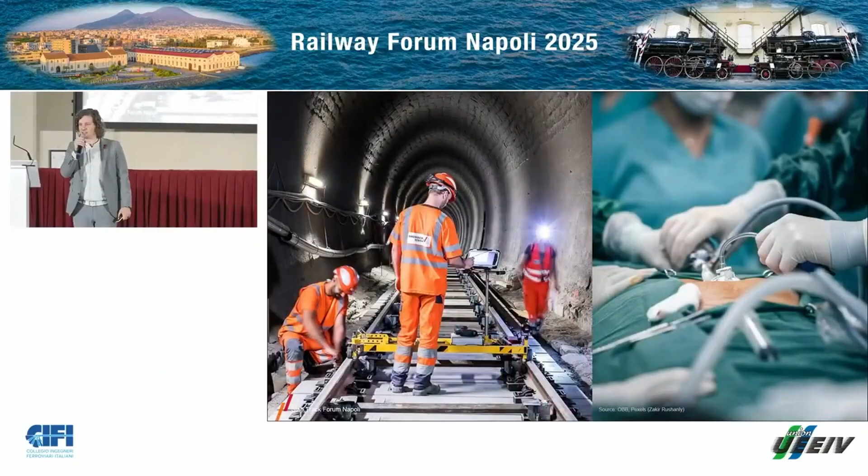What does track construction have in common with operating? Operating in the sense of opening someone's body, looking in there, fixing some issues. Maybe you have an idea. Generally, you will rely on what the person is doing and that they are doing a good job, that they know what they're actually doing, and you will completely trust them.

Also, the railways are a really trusted way of transport. When you're sitting on a train, working, sleeping, whatever you're doing, you trust that someone took good care of the rolling stock, that someone constructed the tracks that you are running on in a good way, that there won't be an issue. And you will not think about any dangers. We feel relaxed, we feel easygoing on trains, and this is because of railway engineers, such as the people we have in here.

So what railway companies and infrastructure owners are looking for are, of course, proven and reliable solutions, but also people who can actually execute properly. Because being a surgeon operating, it's not enough to have the best equipment, a sharp scalpel, or a good light to see what's there, but you also need to know how to actually use those tools.

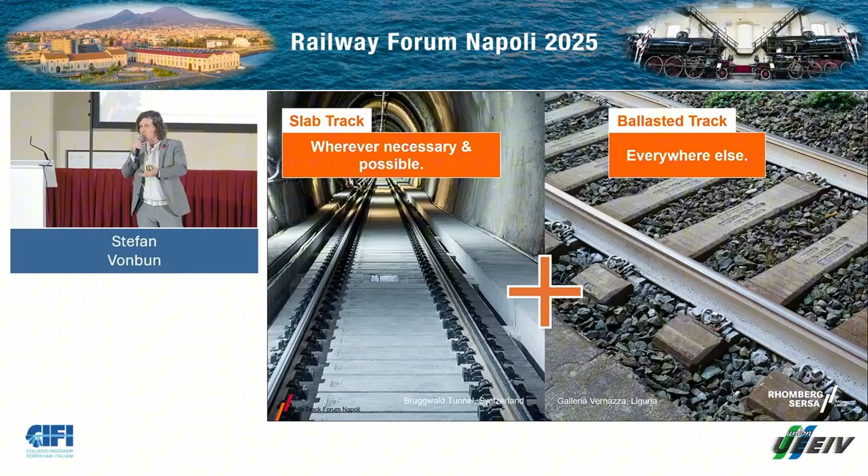So back to the operation slab track. I see slab track as a system that should be used wherever necessary and possible, and everywhere else we will have ballasted track. So it's not an either or, for me it's both. We need the proper systems for the right application. And this is also true for the different kinds of slab track systems. All of them have advantages, disadvantages, so we really have to think about what is this track going to be used for, what are the main design parameters in that project, and that's how you find a best for project solution.

Other things that are necessary for building slab tracks, this is also true for what the colleagues from PORR and VCE said. They said precision is necessary. Yes, I agree. Precision is super necessary because once it's cast in, you can't move it anymore. So you have to be sure that this thing is actually in the right place. Another thing is safety, for sure. Safety is one of the most important topics in the railways, because if we make mistakes, it could potentially lead to humans being harmed.

And last but not least, we need brains to do all that, and not just a little bit. I think we need many brains. It's a team sport. Building track, and especially slab track, is a team sport where a lot of different people have to interact and have to work together to actually make this a success.

I now want to go into a few highlights of projects that were executed by Rhomberg Sersa. The first of which was in Germany, the whole project conglomerate of Wendlingen-Ulm and also Stuttgart 21. There we had, for the first time ever, a system in operation that we call ROMAT, which is kind of a track adjustment robot. We saw in previous presentations that every top-down system needs to be spindled up and somehow put into place, so the top of rail is actually where it should be. Rhomberg Sersa developed this so-called ROMAT, especially for top-down construction, to get into a more automated way of constructing, in this case, the Rheda 2000 system.

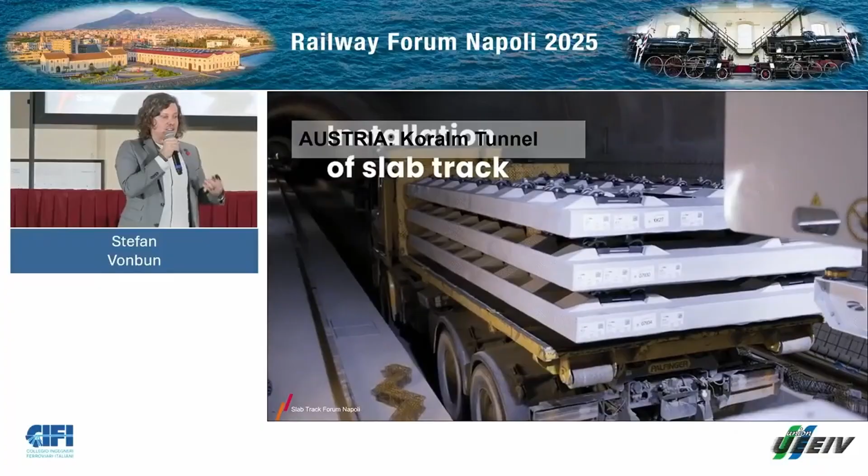Next example, we already heard a little bit about it from the view of PORR and VCE. The Koralm tunnel, also a really important project, essentially a century project in Austria, that is now connecting cities and regions of Austria that were before very far away, so to say. This tunnel really reduces the traveling time and thus enables people to meet quicker, and it brings economic opportunities to regions that were before kind of cut off inside of Austria.

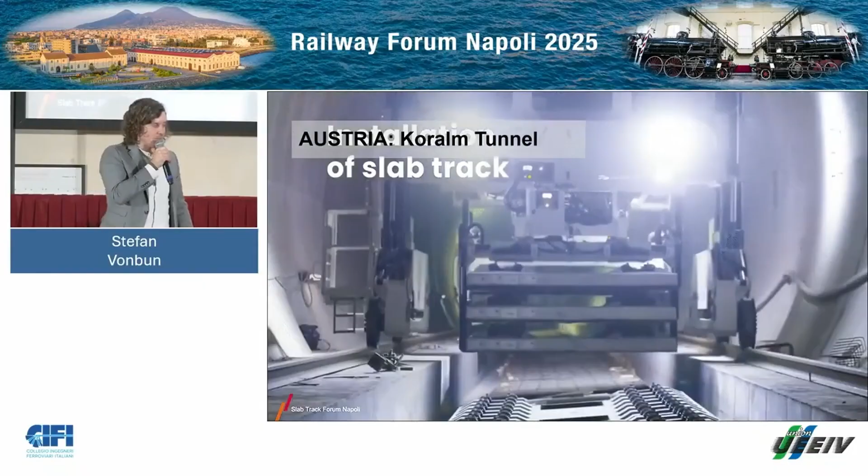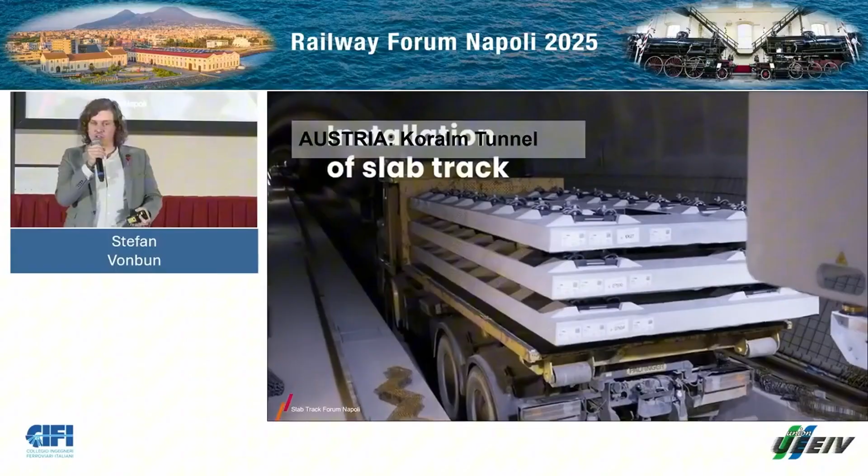An innovation that we used there was a gantry crane, as you can see on this little video. The gantry crane was used to place the PORR slabs, and it can lift 3 slabs at a time. It was a really efficient way of bringing the slabs into the tunnel and accurately placing them.

So build and forget is not really a philosophy that we're on board with. I think you have to think to the end of the life cycle as well. The planned life cycle, but maybe also the life cycle when it ends earlier than expected. Here you can see a picture from a refurbishment currently taking place in Germany, Hamburg-Berlin, where they are actually cutting out track slabs. This is quite tedious work.

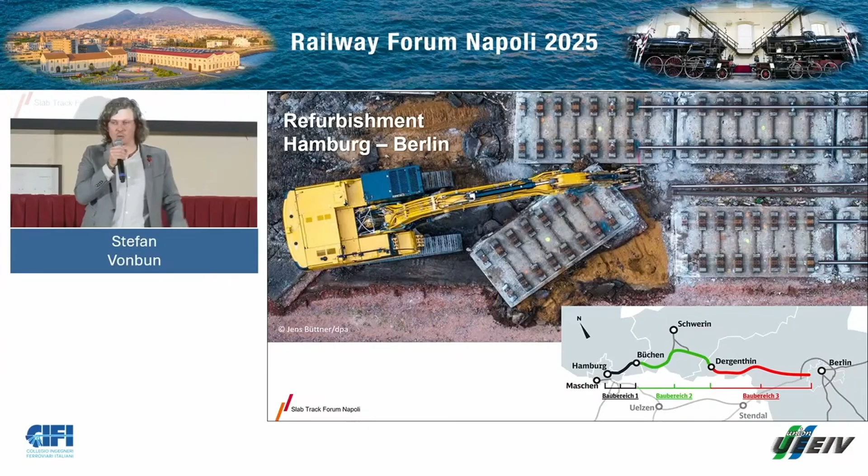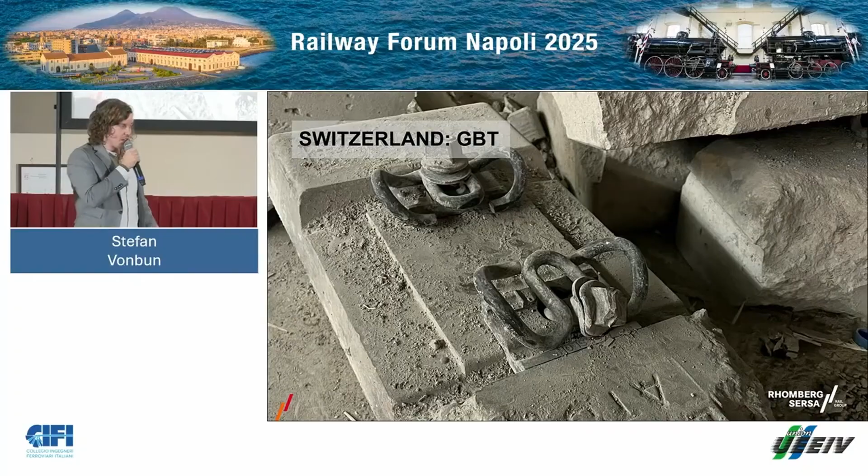Because I not only want to talk about newly built track, but also refurbishments. Some pictures from Gotthard Tunnel. We saw in the previous presentation of Thomas Dorfner mentioning of the LVT system in Gotthard Tunnel. Unfortunately, there was an accident there with a derailment, and in the end, this had to be refurbished.

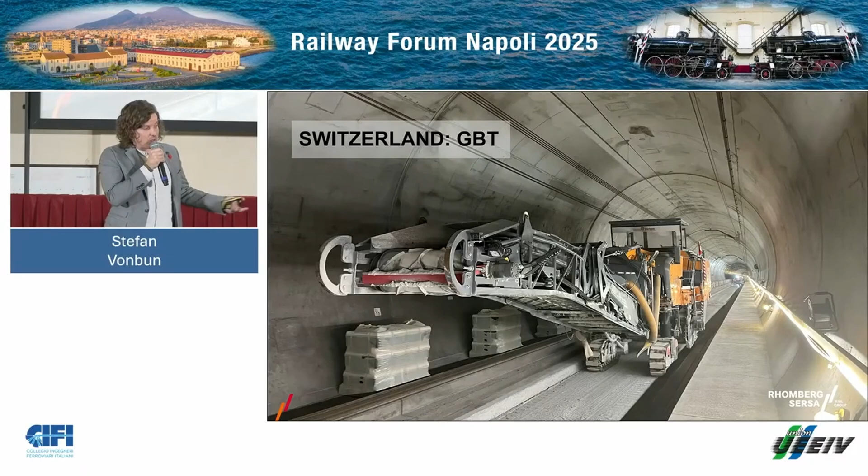And for the sake of speed, high accuracy of the final product, and probably also because the insurance was paying for it, the way of completely deconstructing and building it up newly was the chosen path. So they didn't go for what is potentially possible, replacing the blocks. In the end, we milled out all the concrete and reconstructed the whole slab again with LVT.

And also here, the accuracy is of course very important. Otherwise, you end up with a system that you have to ride on for 60 years, and if that's not accurate, then you have a problem. So, Rhomberg Sersa, as a company, has built more than 800 kilometers of slab track in the past 25 years. So we have a really proven track record of building slab track.

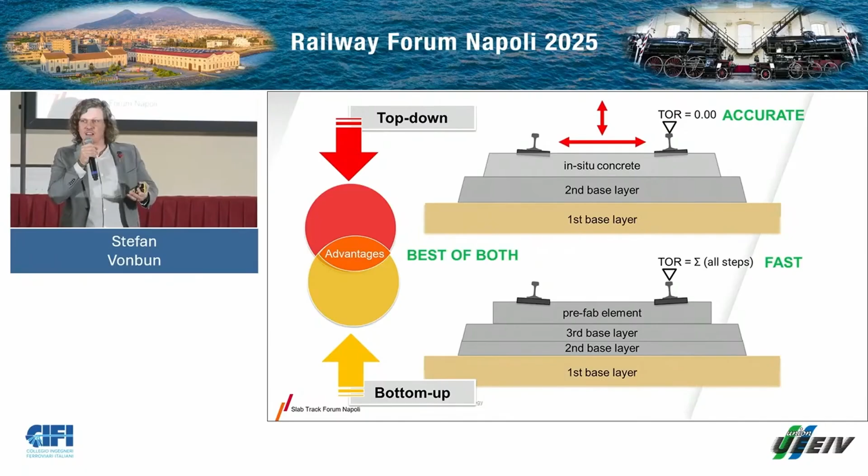And like every inventor, we thought, okay, some things can still be improved about the systems that are out there. So we have heard today a lot about top-down systems, where we actually have to put the top of rail in the correct position, and then we cast the whole system into place. There's also bottom-up construction, where you have higher levels of prefabrication, and you use less on-site grout or concrete. And so Rhomberg Sersa developed a system that combines these two worlds and takes advantage of the good things of each type of construction.

When I last year interviewed a lot of our guys who actually built these systems, this is what actually stuck out to me. The guy said, Stefan, it is as easy as constructing with Lego. And me being a long-term Lego fan, I was happy about this analogy because I think it works really well in describing how our system works. And so, of course, I had to make a Lego version of our system.

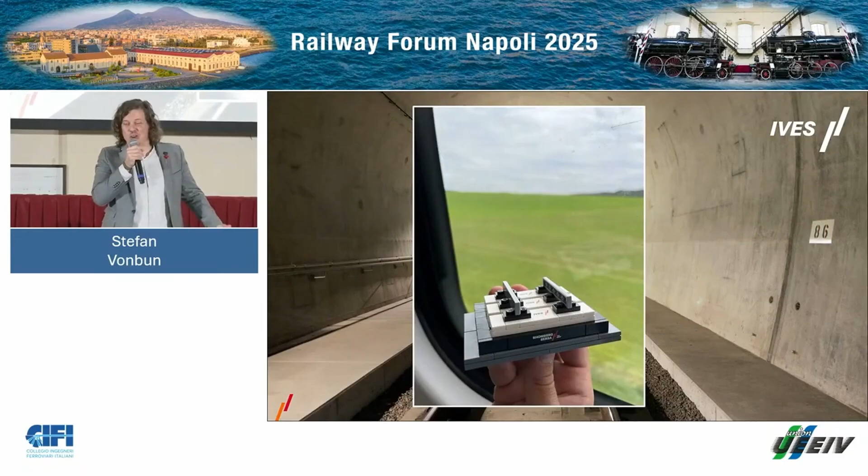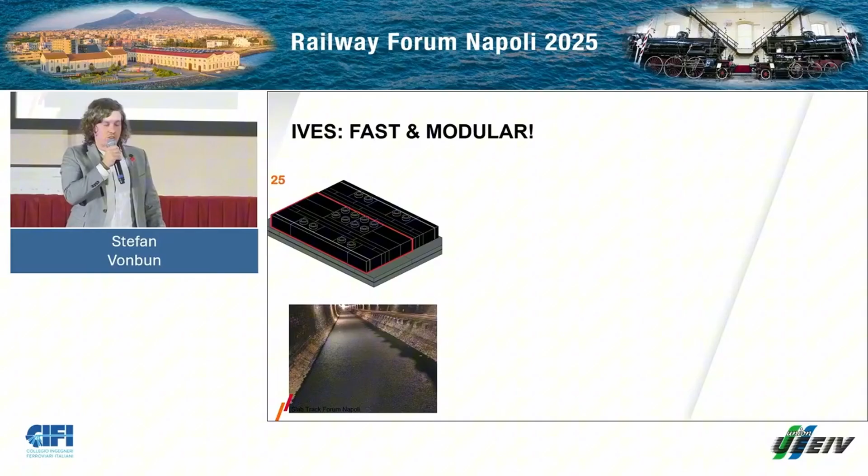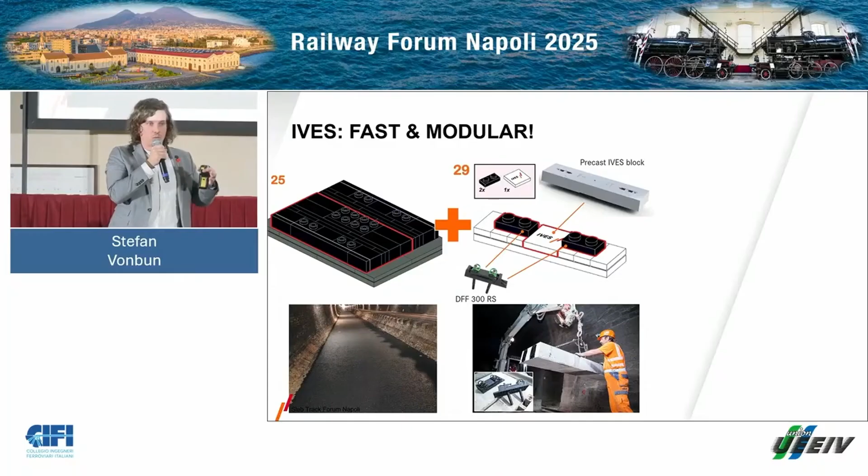And if we talk about the construction of IVES, that's the name of our slab track system, it goes really easily. You have an asphalt base, similar to what the colleagues from PORR were describing earlier. We add prefabricated blocks, and the, let's say, different part is we use a direct fastener, which is cast in place on site. And you end up with a really fast to build and reliably stable slab track.

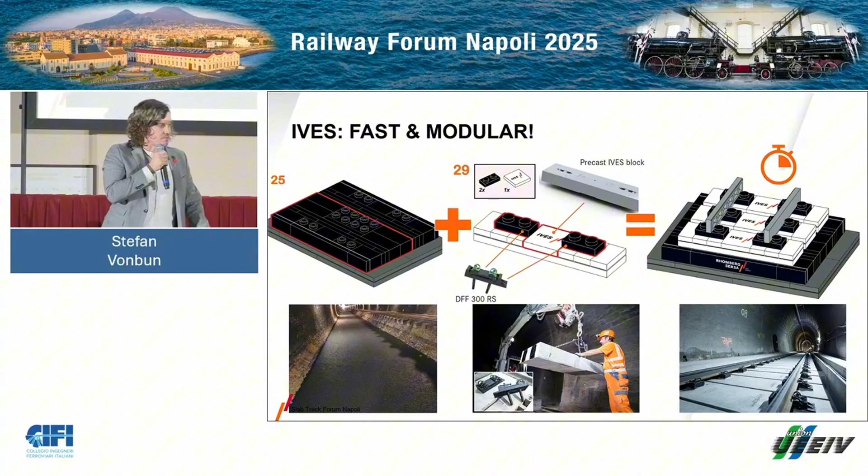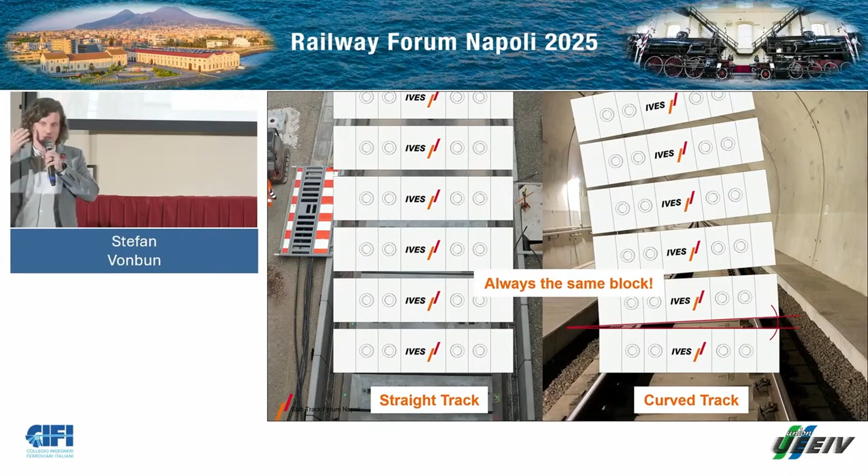Also noteworthy is the fact that it doesn't matter whether you are on a straight track or you go into a curve. You don't need a special type of block or slab. So adhering to the example of the world of toys, you all know these wooden railway tracks that children use. They're very easy to build. It's quite hard to make this into a curve. So either you end up with a polygon or you need a curved piece. And in the room of your children, it might be easy to manage the logistics of these two.

But imagine a 33-kilometer long tunnel somewhere out in the outback of Austria, and then you end up with a huge logistical question mark. How to bring the things there. You have to be just in time, just in sequence, and with the IVES block, you don't have this topic, and down to radii of 40 meters, you can use the exact same block no matter where you go. You can stockpile them and have them in a warehouse. If there's an accident, you just take the blocks from the stockpile and replace the ones that are there.

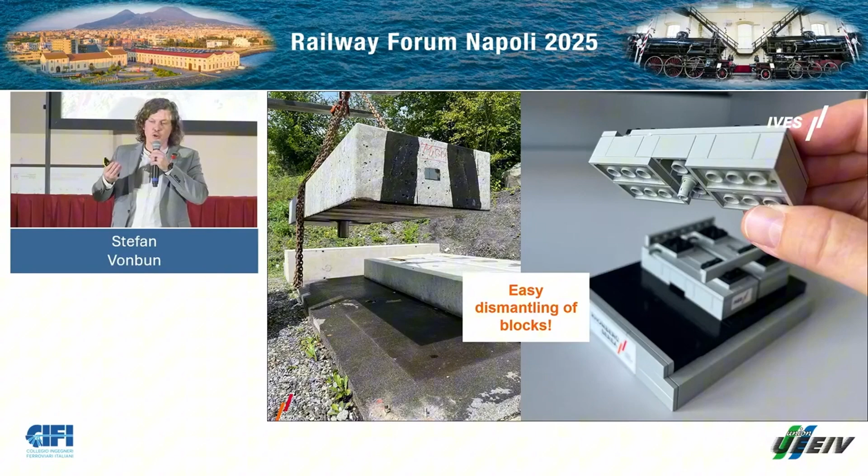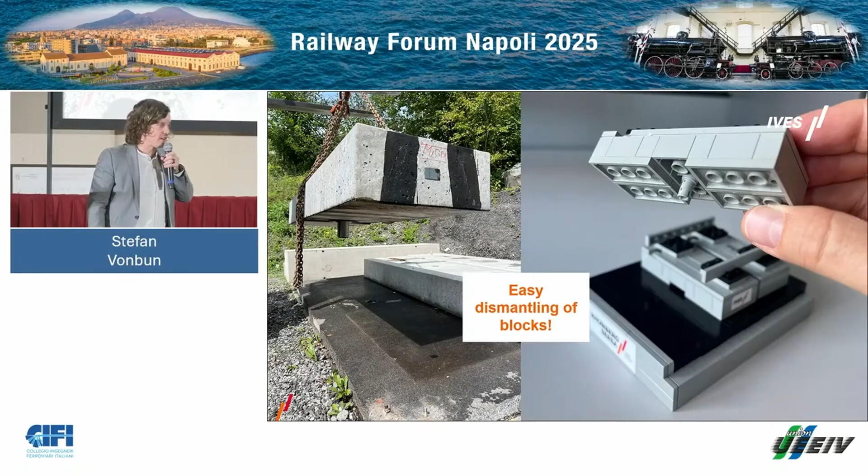Talking about replacement, this system, still adhering to the Lego philosophy, is just a positive interlock between the block and the bottom surface. So we are using a type of shear dowel. You can see it a little bit here on the left-hand side. You can see it better on the Lego version. It's essentially a stainless steel tube that helps to transmit longitudinal and transversal forces. And by means of this dowel, it's fixed in place, but if you lift it up, you can remove the blocks easily and exchange them in a case of emergency.

A lot of people would say, okay, that's all nice and good, but does it actually work, and how does it behave in track? Yeah, this is a very good question, because laboratory tests, etc., are fine, but it's better to actually test the things out in the track. This special piece of track is actually a weighbridge. So trains that run over it are being weighed when they run.

It's located in eastern Australia, and the trains that travel over it are coal trains, and they transport a lot of coal there, 30 tons axle load, and very long trains all year long. And our system has been in place there since 2017. And we have accumulated 1,230 million tons, or 1.2 billion tons, in just shy of 8 years. And if you compare that to, let's say, regular mainline loads in Central Europe, you would end up with an equivalent operating time of about 62 years.

If we would take the Langenlebarn example, where Porr had installed their slab for the first time, where they have 40 MGT, then we would end up with 31 years of, so to say, real-life simulation of the lifetime. And because this works there so well, we got together with the client, with ARTC, and wrote an article about it that was published in October, so just recently, in the magazine ZEV Rail, which is a German-speaking magazine, but we are also working on an English translation of this article.

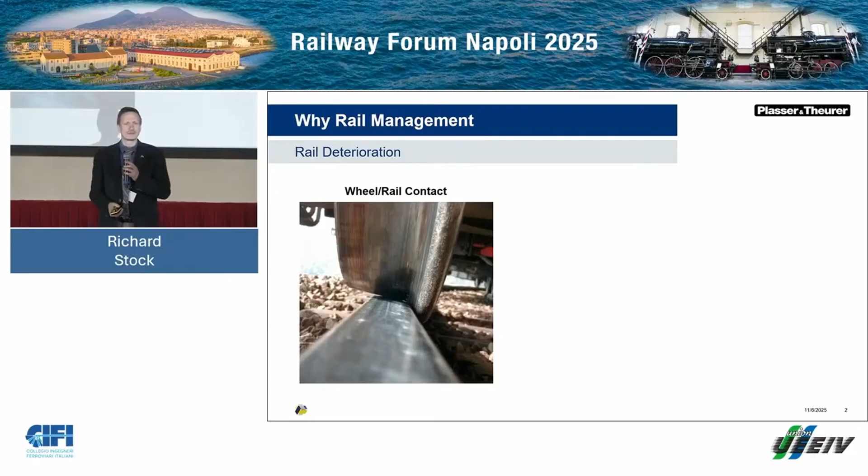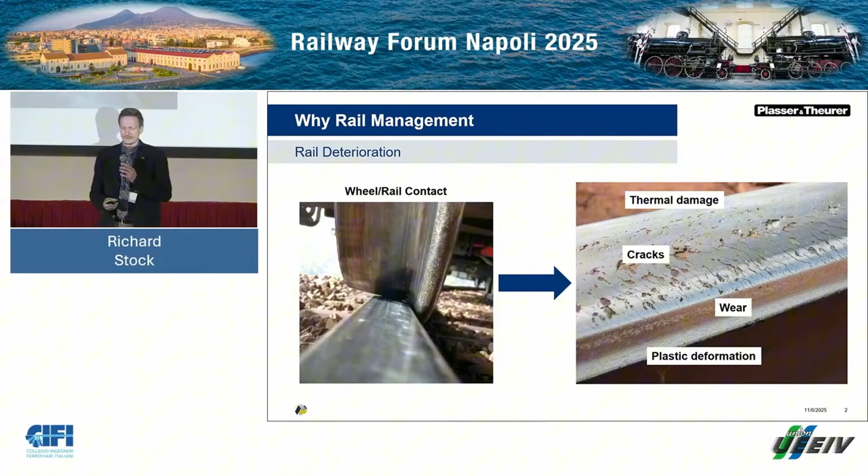And when we look at the rail, we have the rail wheel contact, and this will cause some problems. Plastic deformation, wear, cracks, thermal damage. All these effects will limit the life of the rail. So we need to do something. We need to do rail management.

And to be fair, from a rail point of view, and I'm a rail expert, it doesn't really matter whether there is slab track or ballasted track, because a lot of these problems will be the same no matter which track form you have. But of course, there will be some implications about slab track, and we'll talk about this a little bit later. So in our toolbox, we can look at the material, the joining technology, the profiles, the track quality, the friction management, the actual rail maintenance itself, and then all around this measurement technology and data handling.

Let's get started. So the cornerstone of every new track construction when focusing on the rail is choosing the right rail grade for the right application. There are several rail grades according to the European specification available, a standard grade and several heat-treated grades that will have an optimized material structure for improved performance, which means higher resistance on the one hand against wear and plastic deformation, on the other hand also against crack formation. So by choosing the right rail grade from the beginning, you can do a lot of good. If you don't choose the right rail grade, you start with a lot of problems from the beginning.

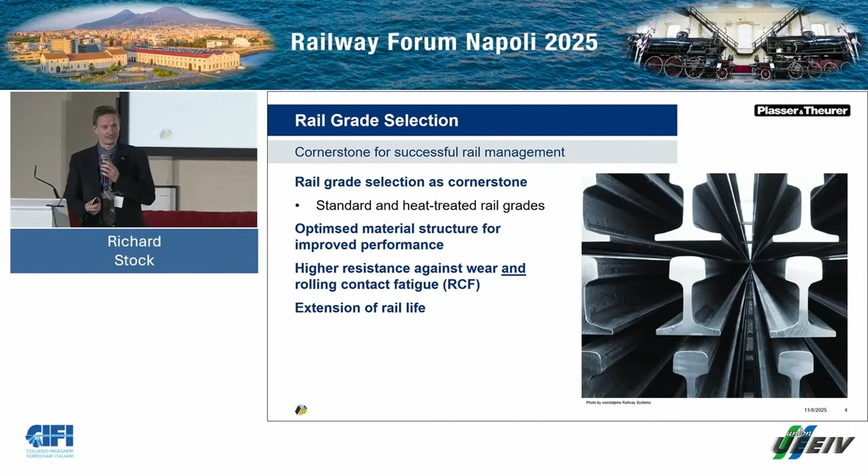Okay, we need to join the rails, of course, because every connection in general represents a discontinuity. We can have classic rail joints. We've seen this in the presentation today. We have isolated rail joints, and of course we have welded rail connection as the preferred way of connecting rails. When talking about welding technologies, thermite welding, flash butt welding, in Asia also gas pressure welding as the main technologies.

What's our goal? We want to create a long-lasting connection that has the same or at least similar properties as the two rails that I connect. And for sure, I want to prevent premature damage, because I can choose the best rails, but if the weld fails prematurely, I can't benefit from the properties of the rails. So the ideal connection is something that the wheels really don't see, don't feel when passing over this. Speaking about welding, the process with the highest welding quality is flash butt welding.

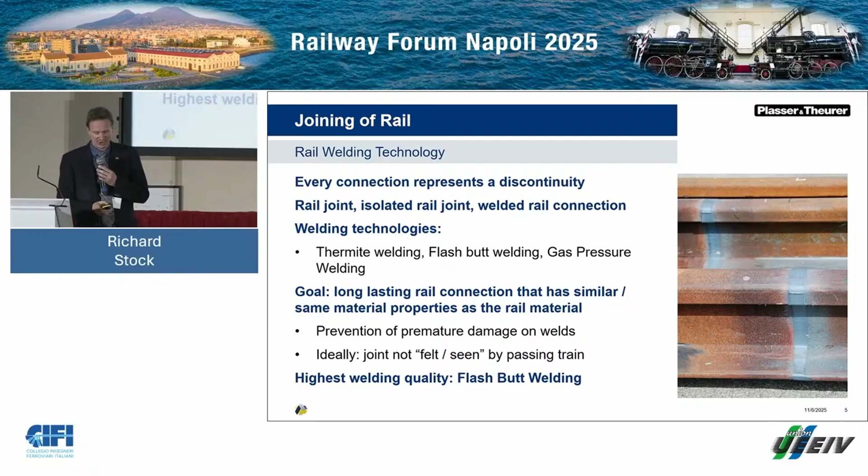Profiles. With profiles, we can manage steering in curves, we can manage stability of vehicles in tangent track running at high speeds. I took the train today from Florence to Naples, great train experience.

With optimizing rail and wheel profiles together, we can avoid conditions that cause high stresses, two-point contact, very narrow contact patches. And we can also deliberately move the contact from one area of the rail to the other, as we do with so-called anti-head check profiles, undercutting here a little bit the gauge corner, and again, delay rail degradation.

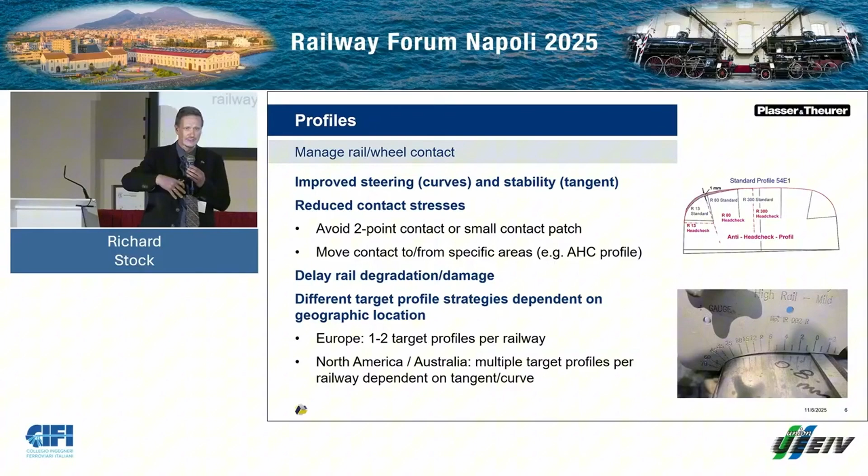When we look at different continents, we have different strategies. In Europe, we typically have 1 or 2 rail profiles per railway, or on the continent, however you want to see this. If we look into North America or Australia, we have a so-called multi-profile strategy dependent on tangent track, the high rail of the curve, the low rail of the curve, the sharpness of the curve.

Track quality. We heard a lot today about precision, high precise track quality. This is a very important feature, and I think that's where slab track can contribute a lot by keeping this track quality over a very long time at a very high level. So how will track quality impact rail life? You can imagine if you have really good track quality, your trains run very smoothly, no dynamic forces out of this track acting on my rail and damaging my rail.

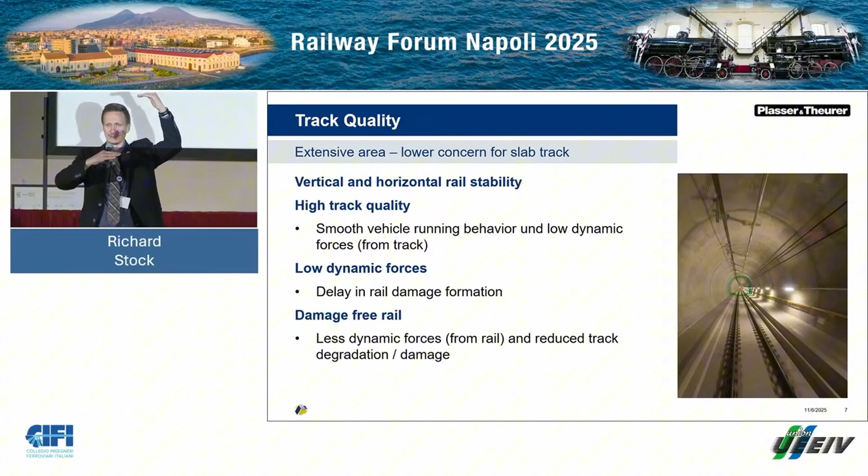Vice versa, if I have a really nice, smooth, well-maintained rail surface, the rail surface itself will not produce any unwanted dynamic effects that might damage my track. So having both of them at a significant level, the system will benefit from each other. If I have one at a high level, but the other one is at a really low level, it will drag the other one down. So track quality, we could talk a full day about this, but not today.

Friction management. We need to manage friction between wheel and rail. We need to adjust the friction at the right location to the correct level. So we want to avoid, on the one hand, high friction, because high friction would mean high contact stresses, quick damage development, high wear. We also want to avoid low friction conditions in certain areas, because low friction could create traction issues. We cannot accelerate, we cannot brake safely.

So when we look at the top of the rail, on the running surface, we want to avoid high friction levels, but keep the friction at an intermediate level to have safe acceleration and braking. So we speak of top of rail friction control with a friction modifier. If we look at the gauge face, we want to reduce the friction to a minimum to avoid wear in curves where the wheel flanges are contacting the gauge faces.

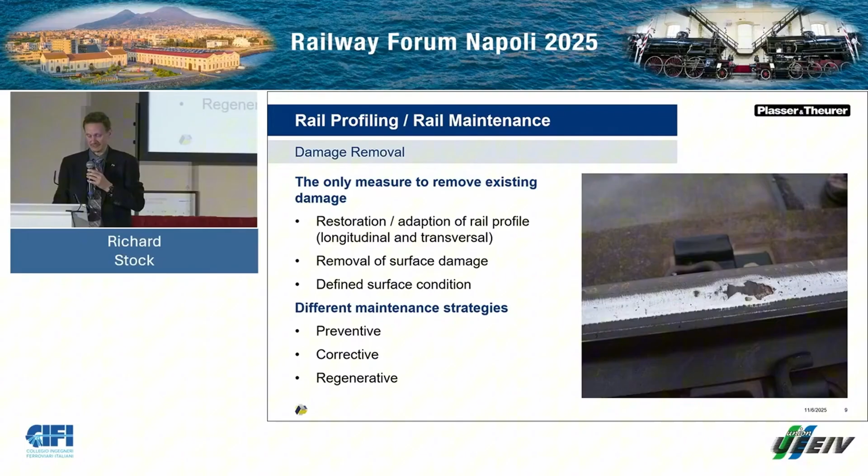And then finally, the rail reprofiling, the rail maintenance activities themselves. And these are the only measures in this toolbox we are just going through that can not just delay damage formation, but remove existing damage from the rail surface. Restore the profile, create a defined rail surface condition. We have different strategies we can pick from: preventive, corrective, regenerative, to get rid of defects like this.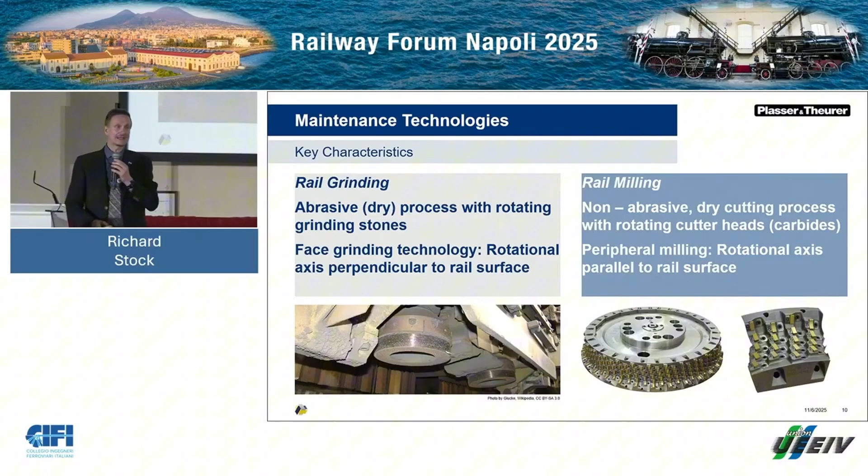We'll look a little bit closer into technologies here now, because there are two main technologies: rail grinding, an abrasive dry process with rotating grinding stones, and rail milling, a non-abrasive dry cutting process with rotating cutter heads that are equipped with carbides along the circumference. And basically, these two processes achieve the same: a damage-free, well-maintained rail surface.

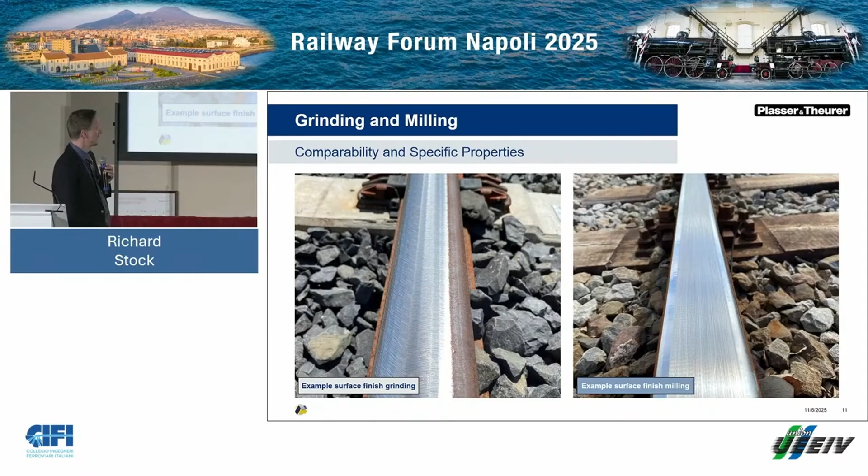Left grinding, right milling looks very similar, but the details differ. And again, it comes to specific capabilities and properties of each process, and this is what we'll look a little bit closer into now. So we always have on top rail grinding with the blue letters, and below rail milling with the blue background and white letters.

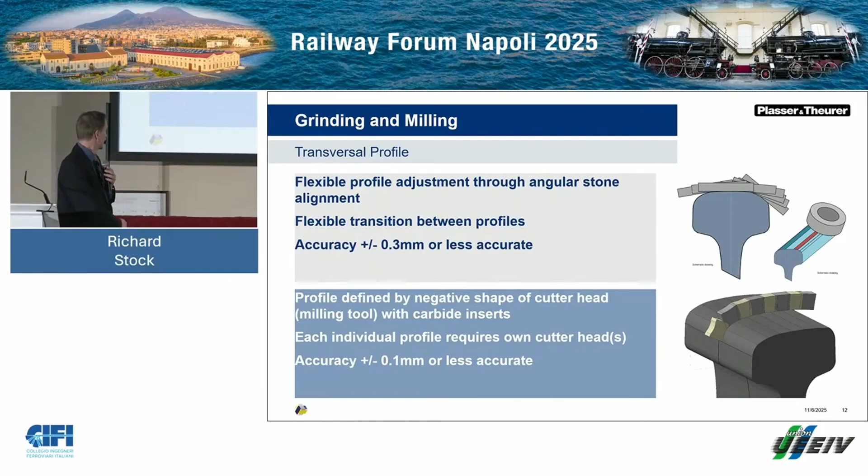So creating the transversal profile with rail grinding is very easy. You just align all these stones in a certain angular sequence and create this profile very flexibly with an accuracy of 0.3 or less accurate. With rail milling, the shape that I can achieve is provided by the negative shape of the cutter head plus the inserts. So this means for each individual profile, I need an individual cutter head, creating an accuracy of 0.1 millimeter or less.

Surface condition: with grinding, we create scratches called grinding marks, and we create an according roughness, and we create these traces of individual stones, which we call facets. And with the process parameters, we can adjust surface roughness within certain parameters from relatively high roughness to low roughness.

Milling itself, on the left-hand picture, creates a very characteristic groove structure on the rail surface, which is in general not a problem. When looking closer to this, a regular structure on the rail surface will always create some kind of noise effect, and that's not very favorable if you do rail milling and you have like a singing rail after each train when the train goes through.

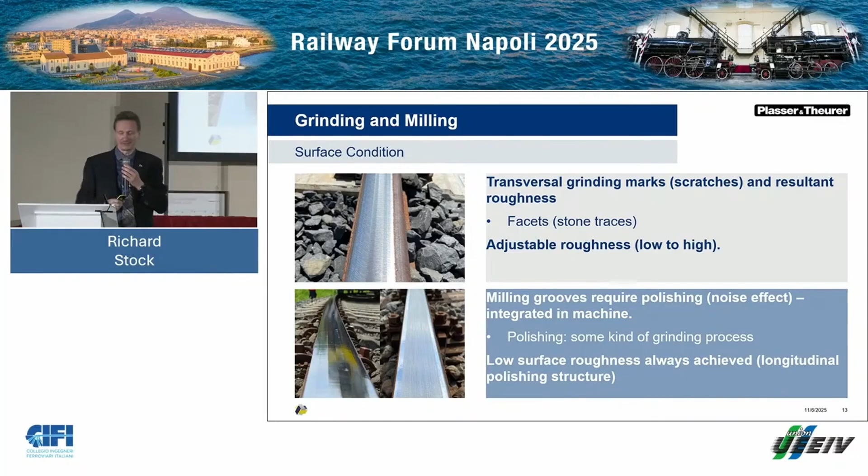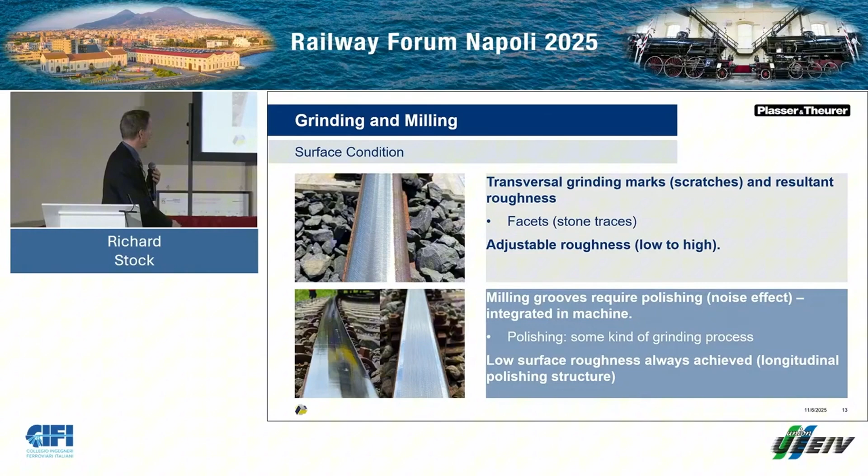So rail milling machines have some kind of polishing process included, which can be usually some kind of grinding that just flattens out this rail surface. So with milling, we always create a low surface roughness due to this integrated process that creates this longitudinal polishing structure.

A few operational parameters, about productivity: speed per pass, the metal removal per pass, and the number of required passes to achieve my desired metal removal. Grinding trains can move up to 32 kilometers per hour, and it's a bidirectional process, so we can grind in both directions. Average speed somewhere between 5 to 15 kilometers per hour.

Metal removal per pass between 0.1 and 1 millimeter, dependent on the size of the machine. You can imagine a 6-stone machine can remove very little. A big production grinder with 120 stones can remove quite a bit in one pass.

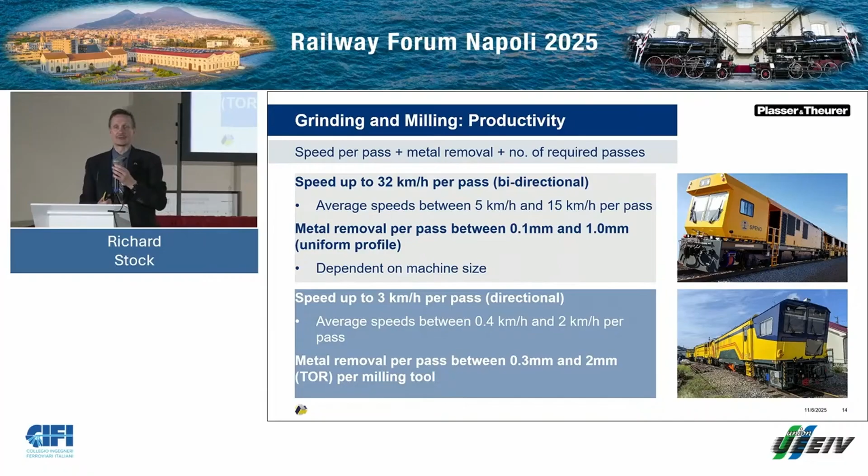With milling, we are a little bit slower, a top speed of 3 kilometers per hour, and it's a directional process. This means one pass, setting back, doing my second pass. Average speeds between 0.4 to 2 kilometers per hour. However, with this process, I can remove way more if I want in one pass, up to 2 millimeters per milling tool. If I have a machine that has 2 or 3 milling tools per rail, I can remove accordingly more in one pass if required.

What else is there? We have some byproducts. We have sparks with grinding, so I need to have some shielding. I need to have some firefighting equipment in the case of a fire. I need a dust collection system because grinding produces dust.

Milling process itself is spark and dust free. The only thing that is created are these chips, but also these chips need to be collected with a vacuum system, stored on the machine, can be recycled afterwards. The polishing process, again, it depends a little bit what process you're using. It might have a little bit of sparks, it might not have any sparks or dust at all, but in the case it's a process that creates a little bit of sparks and dust, you need to have full housing and suction system as well.

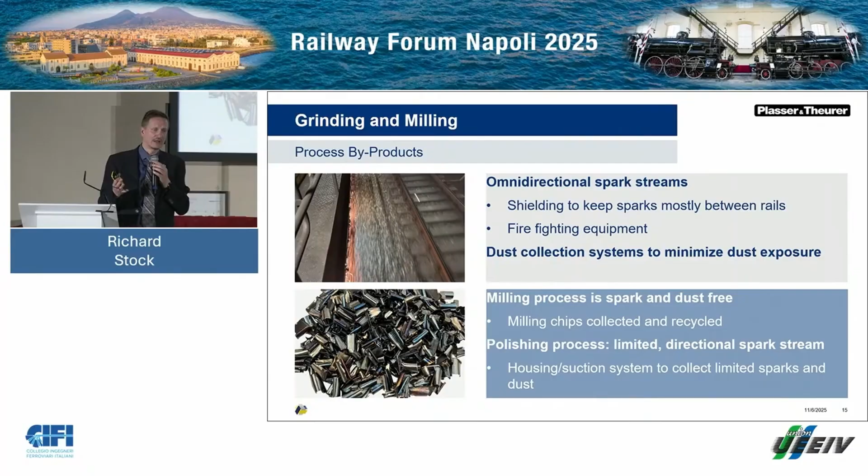A few other aspects, every maintenance process creates process heat, and something will happen with this heat. In the case of grinding, this heat is absorbed by the rails, by the stones, and the sparks. On the rail surface, dependent on the process parameters, this can lead to very thin material transformations called white etching layers. But grinding is not the only source of white etching layers.

Also, traction system of modern trains, when traction is accordingly aggressive, can create these white etching layers. This is still a very controversial topic of what damage can result out of white etching layers or not, but one thing for sure, you will find these layers everywhere in track. With grinding, I can also treat a wide variety of track qualities and rail condition.

With milling, the process heat is absorbed mainly by this massive milling cutter head and the chips. Usually you don't create a white etching layer. The polishing process might or might not create a little bit, but for milling, we need a certain level of track quality, or phrase it differently, we need a certain level of rail stability.

Because in order to make a milling process successful, the workpiece rail must not be allowed to move underneath the cutter head. You can imagine if you have bad track quality and the rail starts to avoid this cutter head, the process will not work, or you might even damage your cutter head. So let's summarize this quickly.

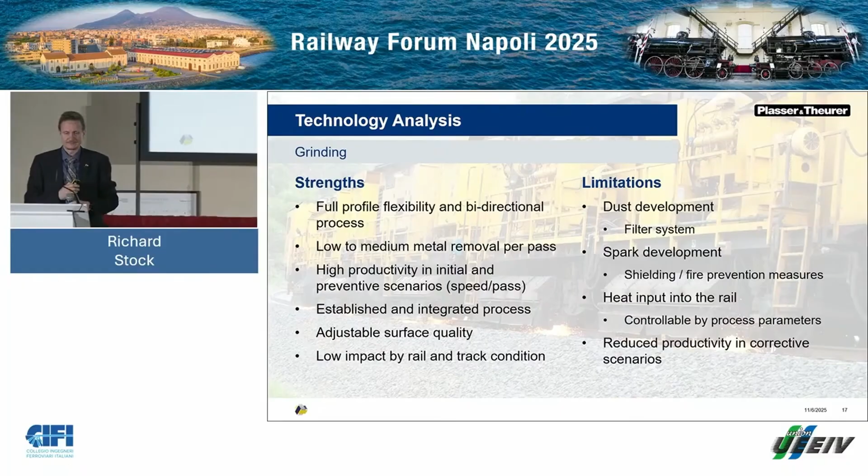For the milling, the strength, we can choose low to really high metal removal per pass. It's a spark and dust-free process with an integrated by-product collection system. We have high productivity in corrective and regenerative scenarios that need a lot of metal removal. So this machine moves slower but can remove a lot of metal in one pass, creating a high surface quality, and it's a generally clean and low noise operation.

What are the limitations? Reduced productivity whenever I need only to remove a little of material because it's a slower process. We have a low profile flexibility. In order to change from one profile to the other, we need to change the cutter head. It's a unidirectional process. For a second pass, I need to set back.

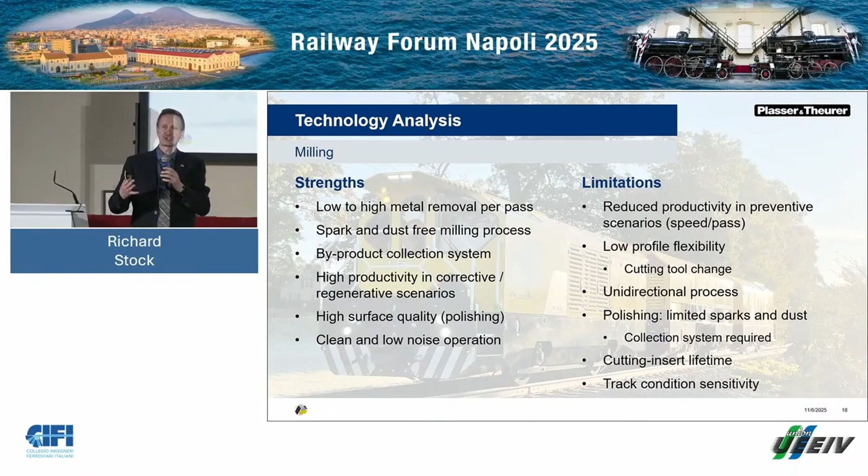The polishing might create some limited sparks, so I need a collection system. Cutting insert lifetime is usually lower than lifetime of a grinding stone on a grinding machine. And we have this certain track condition sensitivity. But nevertheless, it's just a question of using the right tool for the right applications of these two complementary technologies, grinding and milling. Okay, what else is out there?

If you look at tramway tracks, we have the ATMO, which uses block stone technology, either in oscillating mode or in simple sliding mode. So it's just with some grinding blocks that are pressed on the rail surface, and then while this trailer is moving forward, they oscillate.

What's the idea? Preventive maintenance between trains or once per night to keep the rail surface, only the top of the rail surface, in a good condition, with low metal removal. But again, this is just to keep a certain condition as long as possible steady on top of the rail. Reprofiling is not possible with this technology.

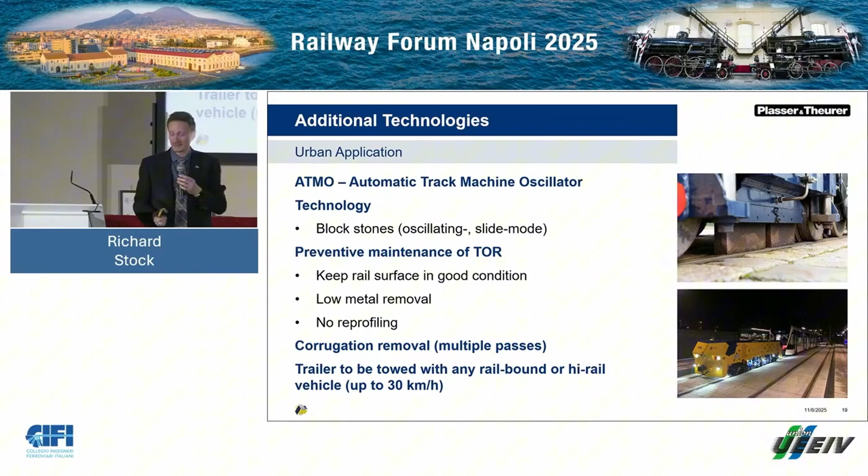It can also be used to remove corrugation. Corrugation is like a wave structure forming on the rail surface. Then you need multiple passes. This specific trailer can be towed by any rail-bound or hi-rail vehicle. Please excuse me the word hi-rail. I live in Canada, so hi-rail means road rail vehicle. With up to 30 kilometers per hour.

So we looked at all these tools that we can choose to apply to manage my rail life. However, very, very important, I need to know my rail condition. I need to be able to quantify my rail condition, because if I don't know what my condition is, I cannot choose the right technology to mitigate whatever is there. So measurement technology is key.

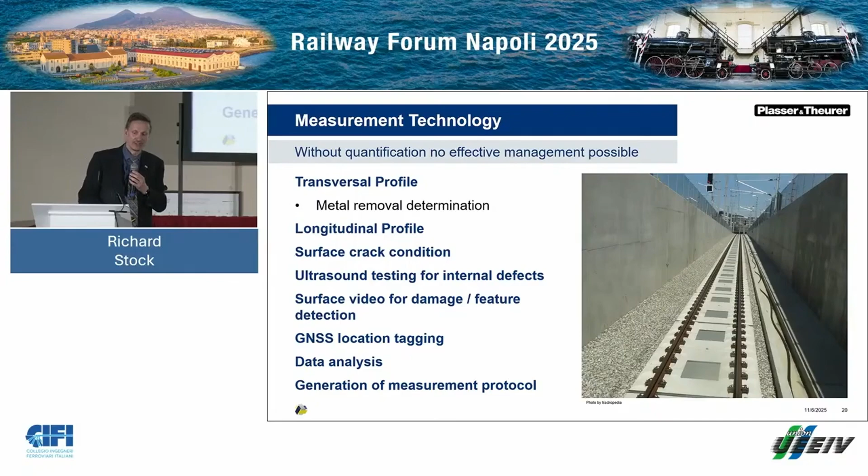Measurement technology for the transversal, for the longitudinal profile, for the surface crack condition, ultrasound to look into the rail, surface video for detecting some surface features and damages, then of course determining the exact location, data analysis and generation of measurement protocol. And what is connected with this is the capability to handle all this data.

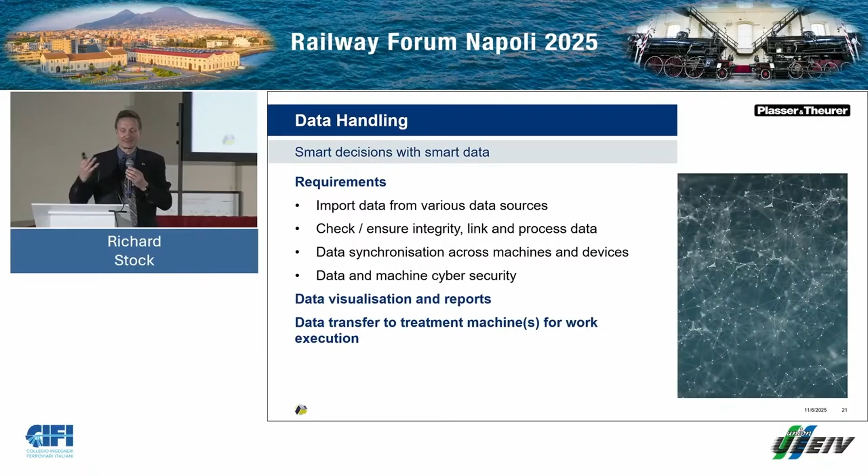Because I might not just have one data source, I will have various data sources with various formats. I need to make sure I can check the integrity, link the data, process the data, synchronize my data across all these different machines. And of course, in times like this, data and machine cybersecurity is one of the top concerns at the moment. Already mentioned data visualization, and then also transfer the data to machines for work execution.

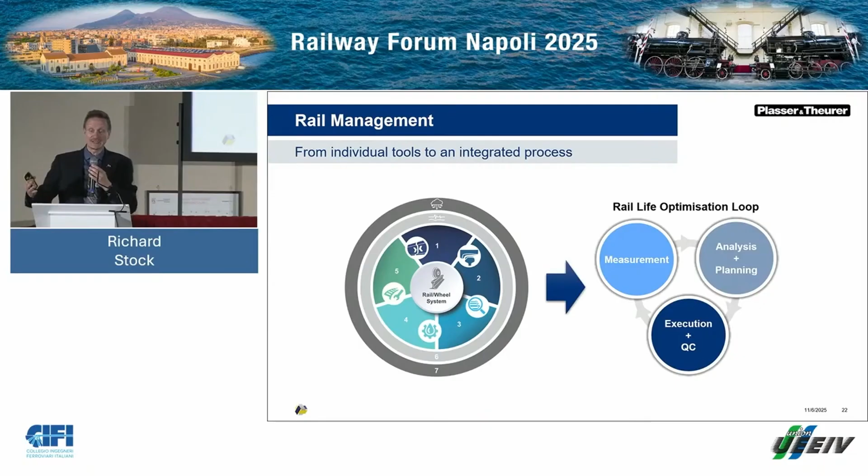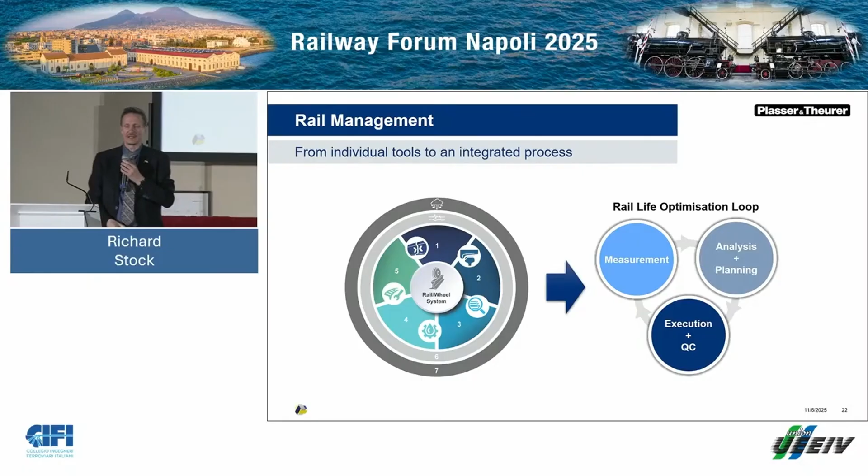So we looked at these tools in our toolbox. Let's have a quick look now how these tools are used in an integrated process, from measurement to analysis and planning to execution, quality control, and then closing this loop and going through this loop again and again in maximizing my rail life. A small-scale integrated process is the so-called robot, which is an automatic local defect repair for rail and frog maintenance.

It's a box-in-a-box system. It's placed on a standard flat wagon with a hybrid power supply. And this is basically including the whole process. You have somewhere a defect that was previously identified. The robot scans, does the analysis. There's an operator in there or two, then it mills out the defect, preheats, deposit welds, grinds, quality control, and documentation. So small-scale integrated process in a box.

Of course, side effect, it's a safe workplace, no one is out in track, and it also counters demographic trends because you need less people working on such a problem. Let's look at this at the end on a larger scale. So how is rail management done, was done, and is it still done? So we have some visual inspections, we have some measurement technology, hand tool or vehicle bound. We create some individual report.

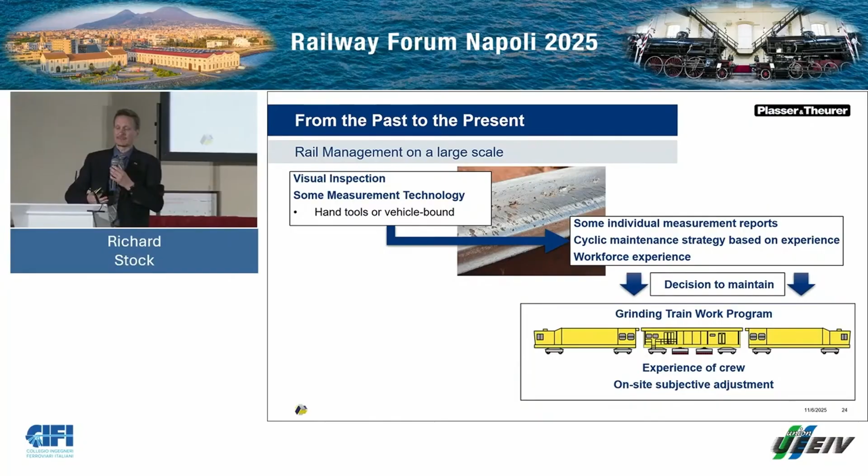The railroads might already have some kind of strategy in place, cyclic or whatever, and there is a workforce experience, and all this data together triggers then the decision to maintain. The track is maintained with a grinding train. There might be an experienced or less experienced crew on there that does some on-site subjective adjustment. There might be some post measurements. And at the end of the day, we have created a shiny rail surface and think everything is okay, but we don't really know.

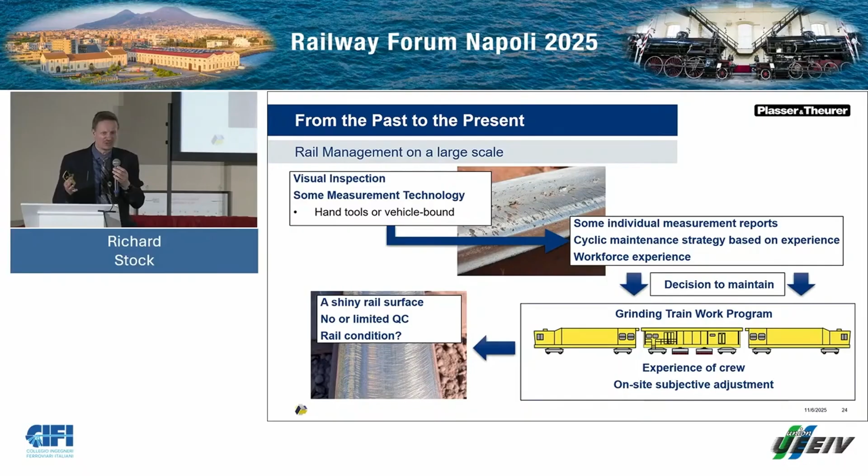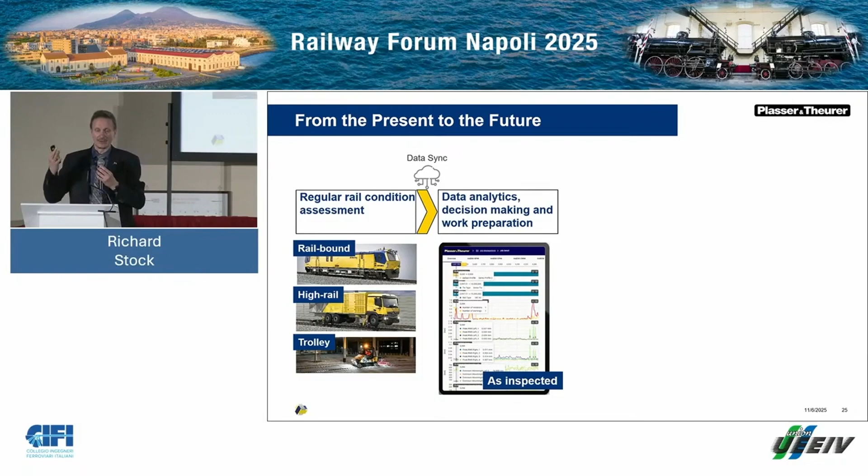So when we do this as an integrated process, we start with the regular assessment of my rail condition, with rail-bound vehicles, with high rail/road rail vehicles, with trolleys that determine all these relevant condition data of my rail, which is then synchronized to a central place that does the data analysis, collects the data, helps you with decision-making, work preparation, provides you an overview as inspected.

Then out of this data we have our work order, which is synchronized to the maintenance machine, but these maintenance machines also have measurement technology integrated so that they can live assess and live adapt their work orders to these conditions, because between here and here there might be some time, some change in the track condition. So the work is executed, QC measurements are done, it's again synchronized, a transparent documentation, a defined rail condition is created, and the report as maintained is done, and then the cycle starts again.

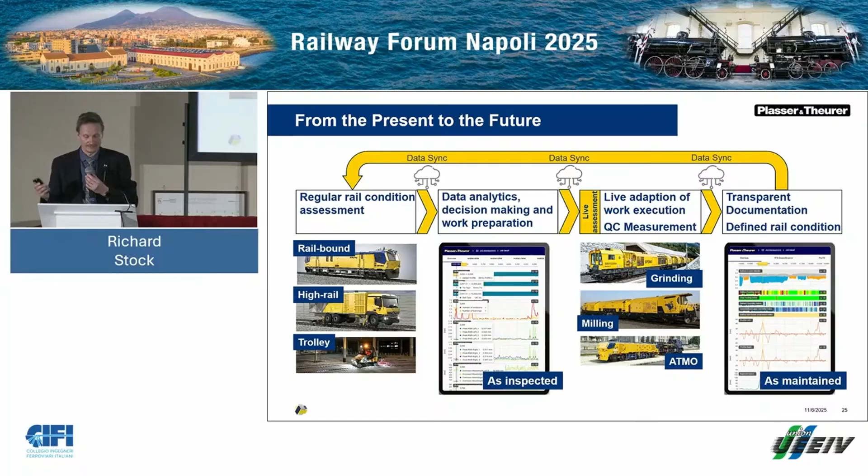So with this, we've reached the end of my presentation about rail management solutions for slab track and beyond. We looked at this toolbox for rail life extension. We saw that measurement technology is really very important. We looked closer into rail maintenance technologies to restore the rail condition: the grinding, milling, ATMO, the robot. We looked at data handling throughout the process, and finally drew a picture of an integrated rail management process for

maximum rail life benefit. And with this, thank you for walking with me to the rail, a little bit away from the slab track, but nevertheless an important component. And with this, thank you very much.

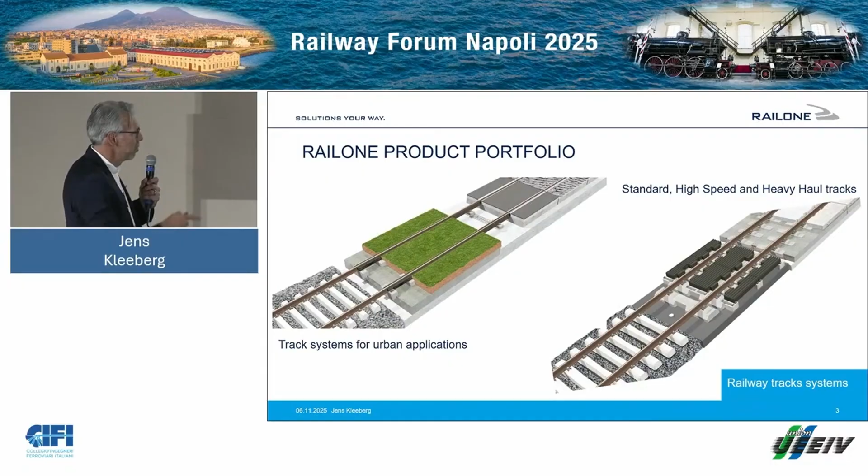I'm always jealous about Plasser and Theurer because they don't have to say who they are. Everybody knows them, obviously. But for RAILONE, it might be different, especially in this environment. RAILONE is a company which provides railway tracks, especially ballastless tracks, but also concrete sleepers for ballasted tracks. We have done that for quite a while. The company was founded in 1894, and at first we supplied telecommunication poles as well as wooden sleepers, and from the 1950s onwards we started to produce

concrete sleepers. In the early 1990s we started to develop our own ballastless track systems together with going international, so we left Germany, which is our home market, with sleepers but also with ballastless track technology, and in 1999 we had this most known system, Rheda 2000, which is a final development stage of earlier systems.

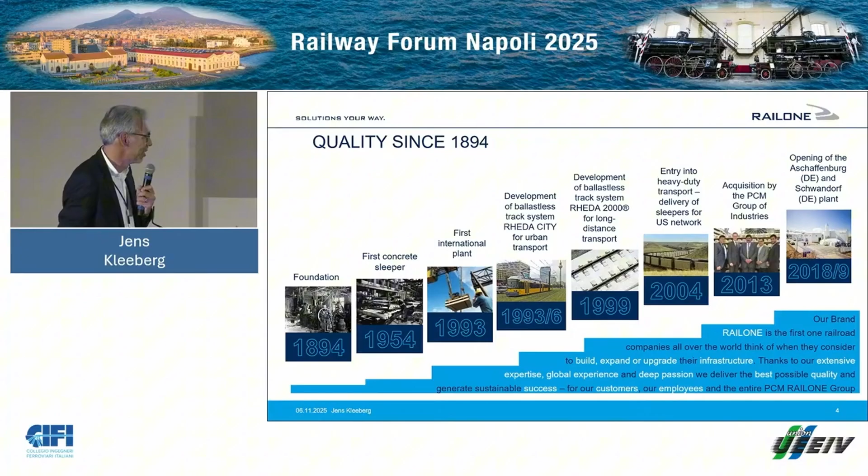In 2004 we went into heavy haul traffic, and just a legal thing, in 2013 we were acquired by an Indian family company who is also producing concrete sleepers and doing track installation in India, which makes us today, I would say, a hybrid between a German engineering company and an Indian-driven business company, which is an interesting combination, I have to say.

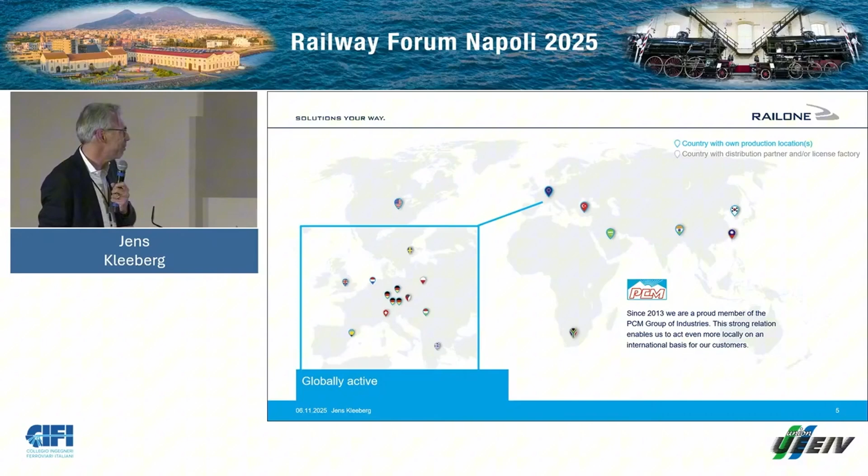Where are we? We are based in Germany, so we have production plants in Germany, 4 of them, but we are also active in Europe at several places, either on our own or with licensed partners, and we do have a plant in the US as well as in India. Obviously, we have partners in, why is this sheet looking like this? Anyway, this is Africa, up here is Europe, Turkey, Saudi Arabia, India, and we are also active in Asia. So of course we are not in each and every country, but we are acting globally, and if you need us, we are probably closer than you would expect. Okay, this about RAILONE shortly.

Ballastless track technology. What do we have? Basically, we have two systems. One is a concrete-based system. It comes with an in situ cast, not precast, concrete slab. Many variations are possible, so this is why I don't say it in general: reinforcement, fiber reinforcement, dimensions for different track applications, induced cracking, whatever. So it's just an in situ cast concrete slab designed on the demands of the traffic mode,

and it comes with the bi-block sleeper, which can hold any kind of rail profile, which can accommodate different fastening systems, high elastic, low elastic, W shape, whatever. So again, independent from the fastening system. So this is one system that we have, and we have another system which is asphalt-based.

It has an asphalt load distributing layer, and on top of it you find a wide sleeper, which is quite a heavy block, similar to the IVES system that you've seen before, which is fixed horizontally. It's not merged into the asphalt. It would not be able to fix it anyway. So it's just fixed horizontally in longitudinal and lateral direction by a fixation block that I will show later on as well. So those are the two systems that we are dealing with,

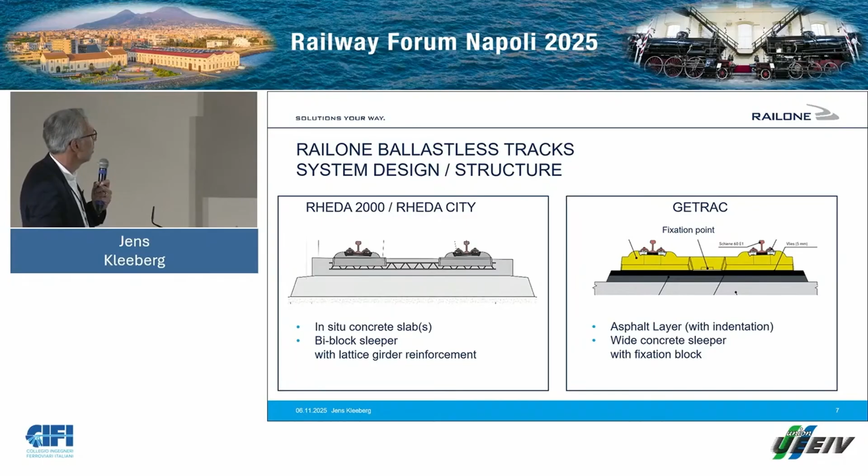and as I said, they are available for any kind of traffic mode, especially Rheda, for tramways, for metro systems, for high-speed traffic, standard traffic, and for a bit more than 15 years, almost 20 years now, for heavy haul traffic as well. We have installed it for roughly 3,000 kilometers worldwide in about 30 countries, and also homologated there, obviously, and as I said, it goes back about 30 years, to the mid-90s.

It does exist for switching, crossings, for mass spring systems, so anything that you can think of, and we really have extensive knowledge and experience with this system. Just to give you an example, I don't know if this is true, but I think it's the only system which is used for any kind of high-speed train, be it a Talgo or an ICE, or the Shinkansen from the Japanese. What else do we have? So I think that's the only system which really is used for all these kinds of high-speed trains.

No, the Italian one is not. We don't have a high-speed reference in Italy. So okay, we have to work on that for sure. Just coming to my mind.

The other system, GETRAC, by far not as experienced as the Rheda system, but still 250 kilometers for a ballastless track application, which is a niche product, still something. The main advantage of this system is that it's very rapid in installation due to the material asphalt, and it is mainly used on embankments and in tunnels and for renewal of existing lines. It does also exist for tramways, for instance, but mainly really for the renewal of standard traffic and standard lines.

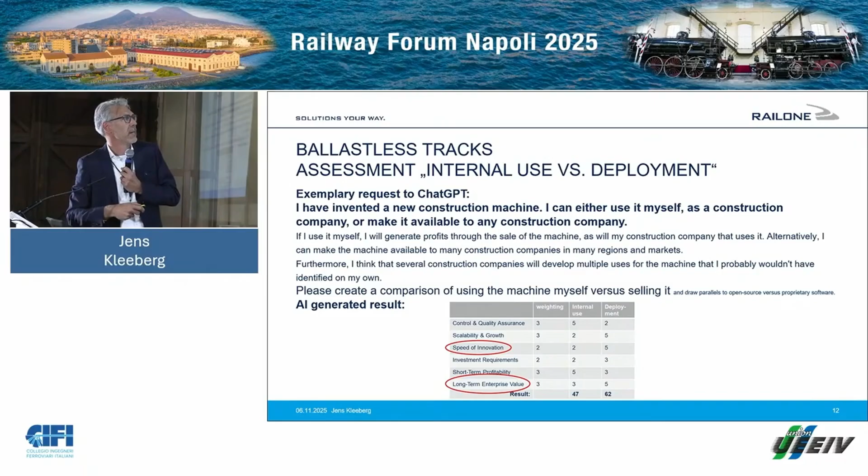And this is what we have basically been doing for many, many years: to develop ballastless track systems, but also to make them available for the market, especially for the contractors. And AI seems to have confirmed this approach. So this is, again, what I said before. We are a system supplier with really extensive knowledge on how to design a system, how to do the homologation and choose the right components. But on the construction side, if you give it to a group of qualified contractors, construction companies, then they really can make the best use of the concept that we are providing.

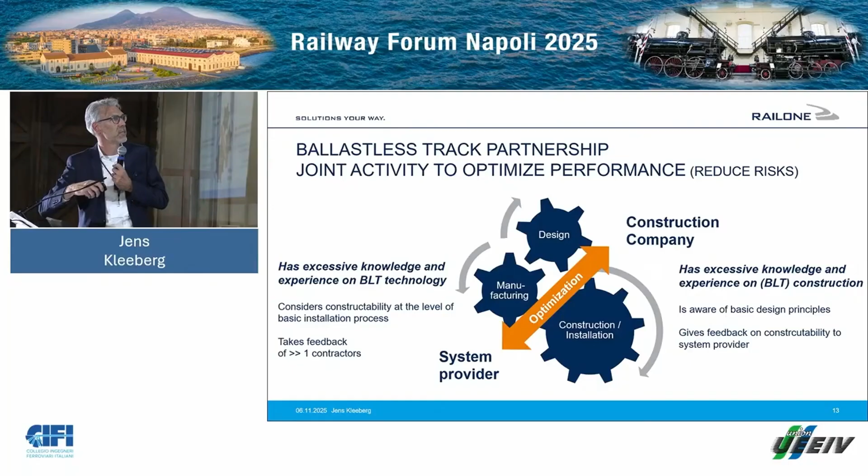Anyway, let's have a look at the installation process and where we really made some benefits. As I said, we have the Rheda group with the in situ cast concrete slab and bi-block sleepers. It is installed top down. That means, as said before, the rail is held in position before you do the fixation of the track or the casting of the concrete slab. Before, of course, you have to lay out the track and bring it into precise position, and then do the pouring of the concrete slab.

Contrary to that, the system with asphalt, which we call GETRAC, is bottom-up. So you first build an asphalt layer, and on top of the asphalt layer, you lay the sleeper, you bring the rail, and you do the installation of the fixation block in the center. In detail, what are we doing?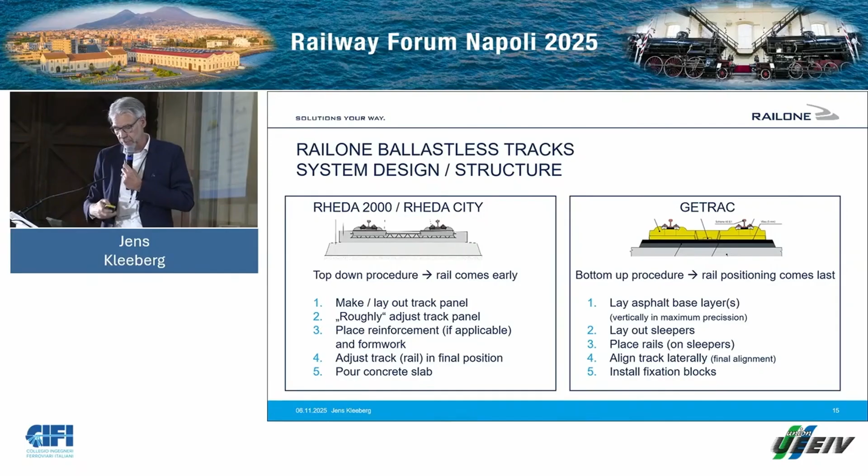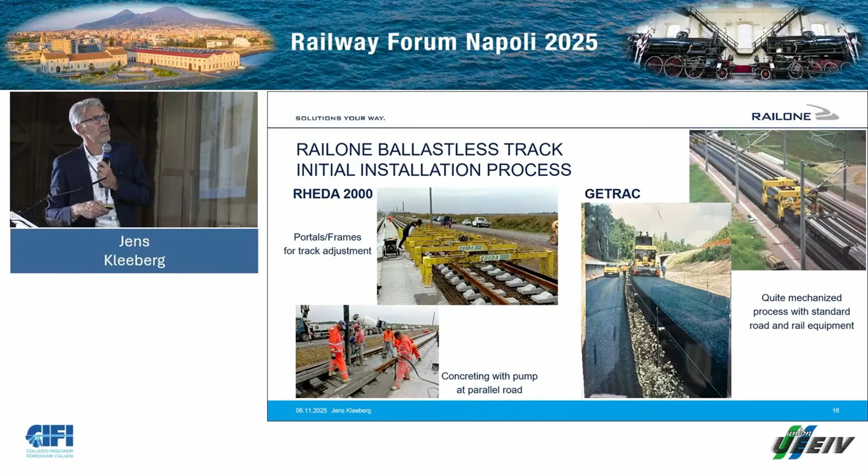For asphalt, it's a little different because asphalt was poured from the very beginning with standard road equipment, which is highly developed. That is something which existed already in the 90s, and so that was used at that time as well. And for the laying of the track, since you receive a stable surface where you can lay the track, it was also done for one of the first applications with these movable portal cranes, which is standard ballasted track installation technology. So GETRAC was from the very beginning done on a very mechanized basis.

One thing that has changed or developed a little bit, and that is of course an essential one, because I think we all agree that the best welding is, sorry for Plasser and Theurer, the one that you don't have. So long rails obviously are the way to go for high performance tracks, high speed tracks. What has been established in the past is either construction with short rails or construction directly with long rails, which means you have to bring them on site without having a track. If you do a new track, obviously you don't have a track. This means you have to transport the rails on site without rail equipment, but it has been found out in the meantime how to do it.

If not, then you can work with short rails on islands, from A to B with no rail connection and so on. So it is not an issue to install a track with long rails in the end, in two ways. Of course, if you directly go for the long rails, you don't have to do the second installation step of the long rails, which saves money, and you save the money for the construction rails themselves. So long rails are nowadays really a process which is under control for the installation of ballastless track on an isolated stretch.

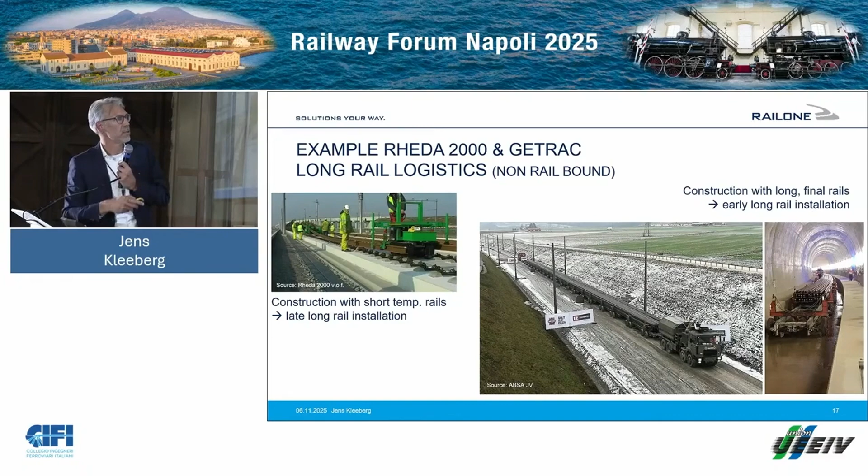And the other thing is always the drainage system. You have to see where it is, and if you can manage the amount of water which is existent in the tunnel. But for the rest, clean the floor, and then you can install an asphalt layer directly on this layer. And depending on the accuracy of this tunnel floor, you either have to install 2 asphalt layers or only 1 at a height of 70 millimeters.

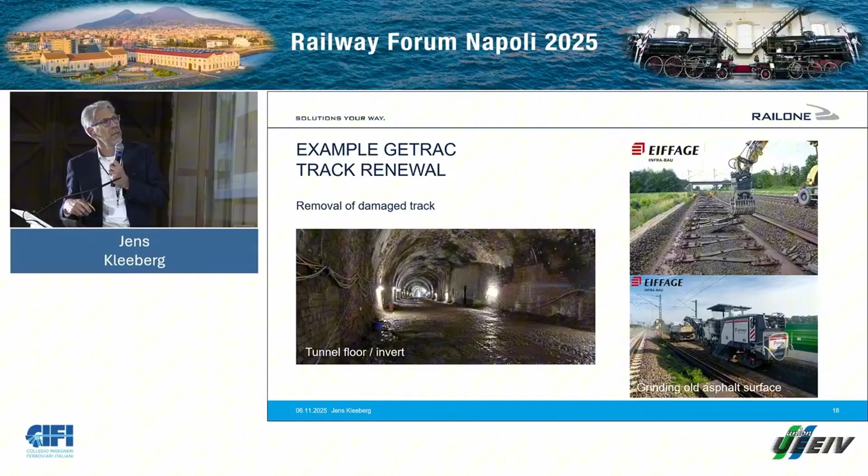This is an example of an existing asphalt track in the west of Germany, which was equipped with steel sleepers, and they were corroded, so they had to be replaced. And what they did is just took away the sleepers and then did a single grinding run, and then this grinded layer was completed by a new layer of, I think it was 60 millimeters or 70 millimeters of new asphalt in high precision, of course, and high precision means, again, as I said, you use the standard asphalt technology. However, you have 2 wires to both sides, although the slab itself is only 3 meters wide.

Just to mention, our tracks have been installed in the meantime, as I said, in 30 countries, and I think it's more than 100 contractors who have installed our tracks. So some of them are mentioned on the pictures. Please, if I forgot any of you, it's not on purpose. It is just too much to mention here.

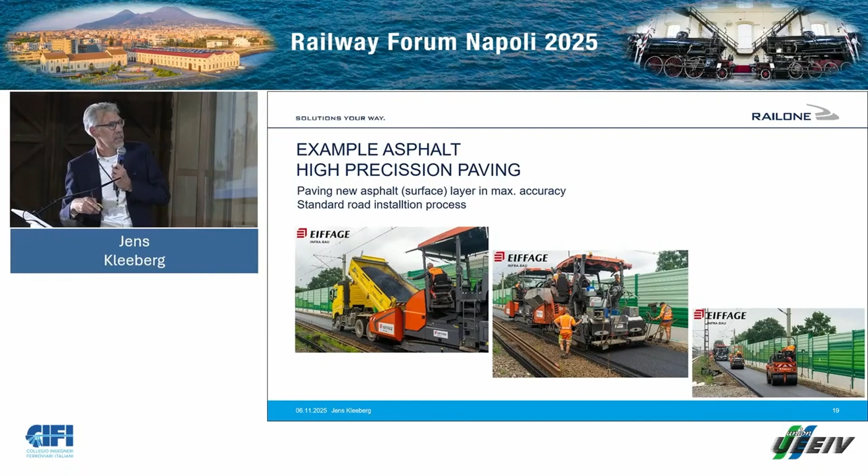Anyway, this is the asphalt installation, and what you do next is to place the sleepers, either logistical-wise, if you don't have a parallel track, which is existent here anyway, or like here, where you can take the sleepers from the train. You can also bring them with a truck, lay them down, and then put them over. And what you see here is the recesses for the fixation block in the center. Again, standard grinding technology, however, with a circular shape.

And in this recess, you have the blocks. We use concrete-based blocks. It's like a big ash tray. And they reach in this recess, and then in the end they are filled up with cement grout. And then basically you're almost finished, in contrary to that for Rheda tracks, which is a top-down system. You first have to install the track.

An essential thing that you need to do is logistics, so how to bring in the materials. Most of the time on an embankment structure or something, you find enough space to have these stacks next to the track. This is, of course, a perfect logistic condition that you can ride on the track, so place the materials which you need, especially the sleepers, but you mostly find that in modern tunnels as well, because you have the evacuation path to the side. So this is how you do it, and then you just lay them on the ground.

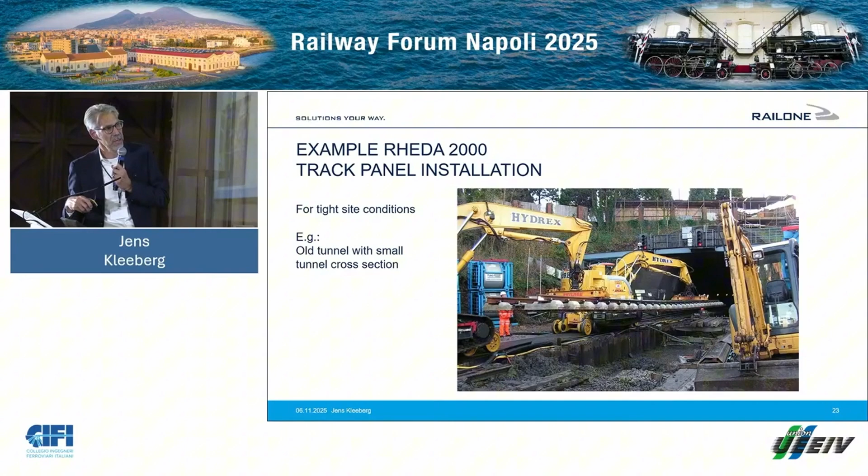If you do not have the space to store the sleepers, then this panel installation has been done as well. This is, of course, a shorter panel with 18-meter length, something like that. But you can also make use of the faster and efficient track installation method.

We are frequently asked whether you can ride on a sleeper with an excavator, with the axle load of an excavator. That's a typical example of a cooperation between a contractor and a designer of a track. It depends how you treat the sleeper and how you support it. A monoblock sleeper, if you just support it in the middle, it will crack as well. And it's kind of similar with the biblock sleeper, but basically it can be done. And this is a typical example of a cooperation between us as a designer of the sleeper and the track and the installation company who is doing the construction work. So that can be done as well.

For GETRAC, as I said, installation with frames. And we had some talks, but I don't remember, with people from Plasser about having the GETRAC track installed with these really powerful track installation machines.

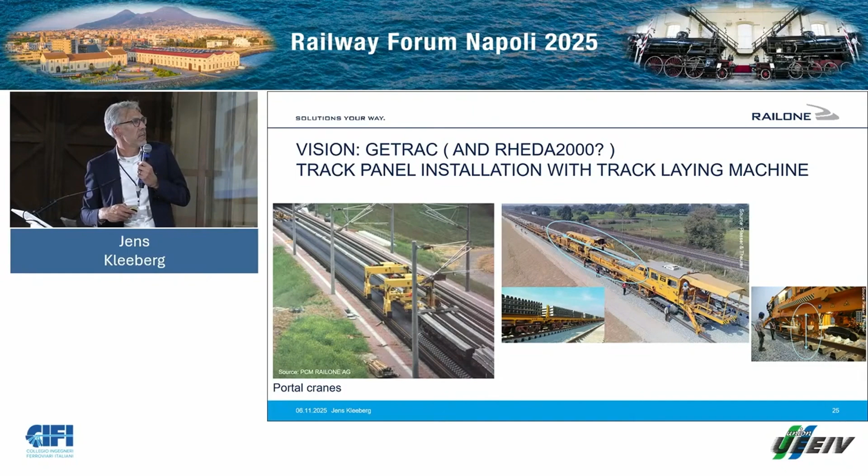And of course, we have slightly different sleepers. They are wider, they are heavier. So we would have to modify, let's say, the internal logistics or the transportation of the sleeper up here and to bring them down on the surface. But basically, that is possible if you would have an installation of a GETRAC track in the respective scale. So that would be laying of track for Rheda and for GETRAC.

GETRAC positioning: you lay down the sleeper, and that is before you do the installation of the concrete block. And the horizontal alignment is done by, I'm almost finished, there's barely anything more powerful than a tamping machine. So running with the tamping machine, of course without tamping, but the precision or placing tool of the machine is used to bring the track into the correct horizontal position. That's how we do it.

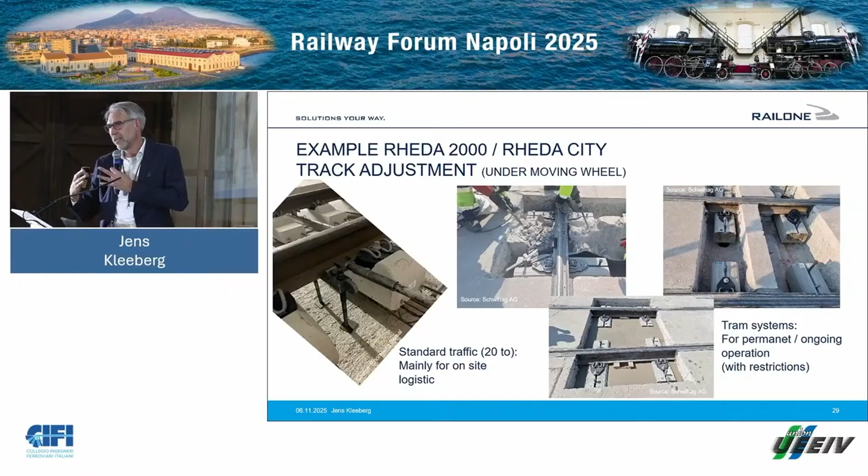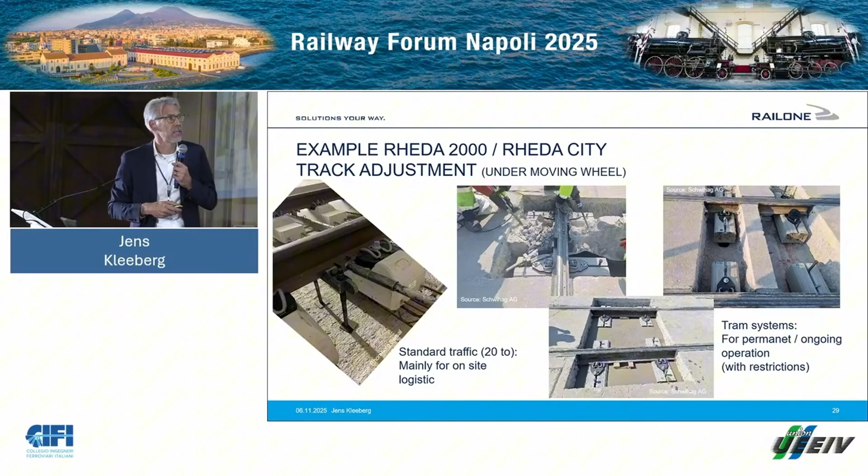We barely do that for standard tracks because of signaling issues. So normally, if a normal track is installed, you close the line, do the installation, and go as fast as possible. For tram, we frequently have permanent traffic and only block the track for 6 hours or so for the concreting work. You can do that if you have somewhat more rigid sleepers and a pair of spindles to both sides, then you can do the casting in between and permanently run on the tramway track.

Concreting used to be like this. I know, 2 minutes, 1.5.

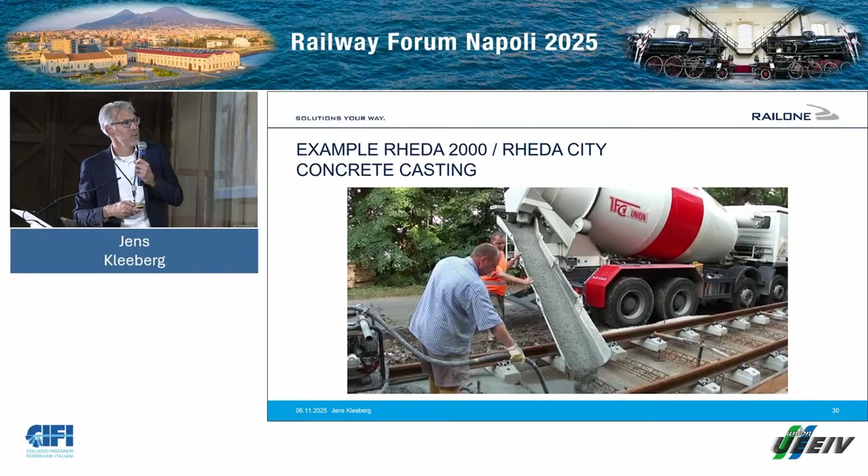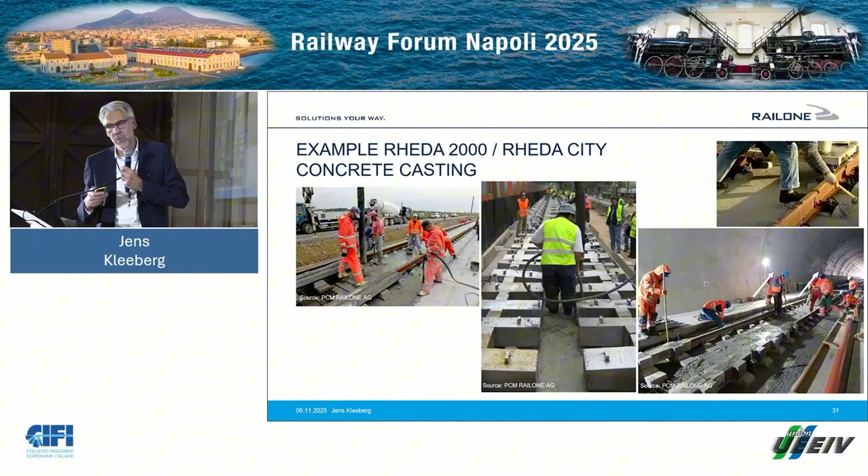Concreting used to be like this, and it still works. This is a recent picture from, I don't know, this summer. Of course, pump and so on, this is still frequently done. If you have a small stretch, just do it the standard way. However, to increase the quality and also to make work easier and faster, because the concreting process is one of the slower processes, I would say.

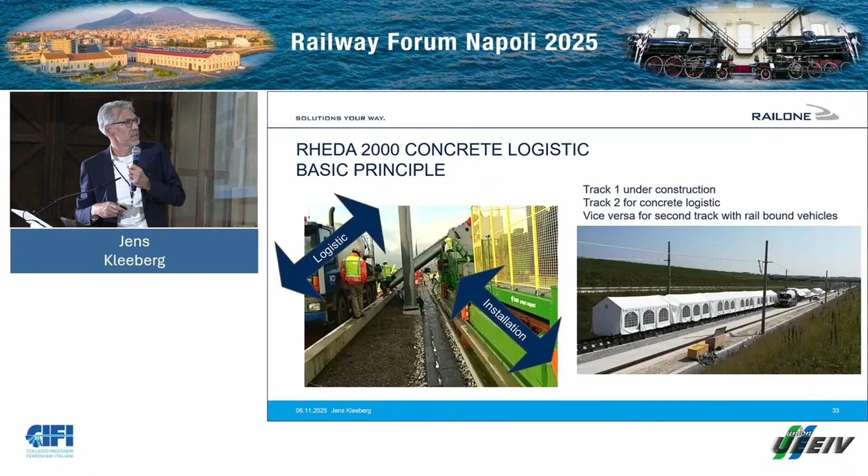You can have these machines which are running on the rail, and then you do the concrete pouring in a very controlled way. And you see this one from the company Rhomberg, where you have the concrete inside and the logistics in parallel. And I think I close with that one because the other one is just site information that you can have a look at by yourself.

If you look at this one and imagine it would be yellow, so a track laying machine, a track renewal machine, then basically we are almost there to be able to do a track installation on one track whereas the other one remains in operation, if we slightly modify, and we have seen some ideas today, the logistics and have it on the track itself.

But if you imagine this installation train with the other equipment beforehand, just self-propelled, running along the line, having the logistics from the other side, I can imagine that a renewal of a track from ballasted into ballastless track or from ballastless into a new ballastless track could be done on one line as well.